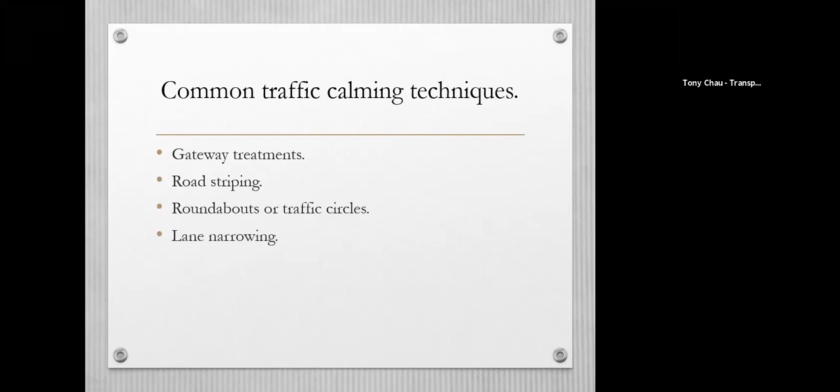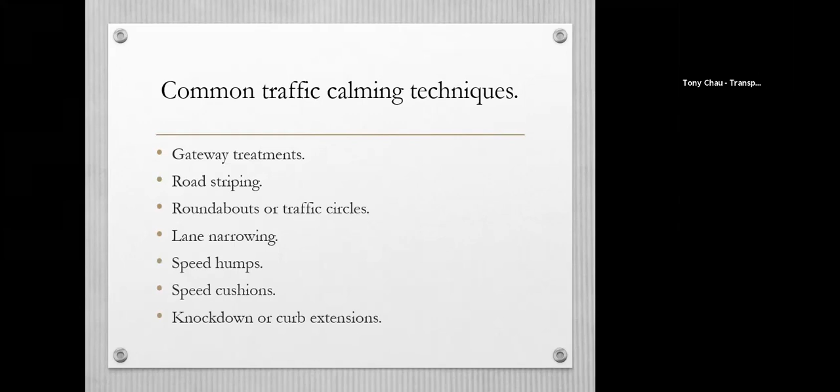Common traffic calming techniques include the following: gateway treatment, road striping, roundabouts or traffic circles, lane narrowing, speed humps, speed cushions, curb extension, and our newest option, which is speed display sign.

So we'll go through each of the options slowly, and hopefully you'll have a feel for what options you like and what options you do not like.

So the first option is gateway treatment. As you can see in this picture, there's a median with landscaping, a crosswalk and pedestrian-friendly features, and differentiated pavement to let drivers know there's pedestrians that could be potentially using the sidewalk, and also cyclists.

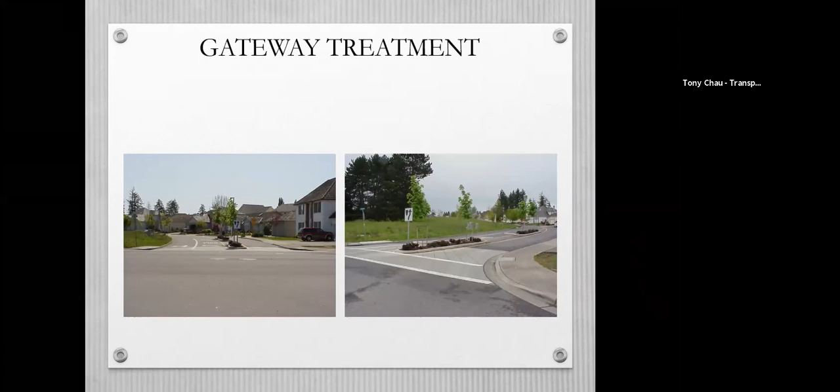You can also see the sidewalks on the side of the road. In this one, you also see a median, sidewalks, curb features, curb ramp features, and this is at a signalized location.

So here's the advantages of gateway treatment: it identifies a changing environment from arterial to residential street, reduces entry speed, reduces pedestrian crossing distance to make it safer for pedestrians. It can also provide landscaping, make the street look a lot better, and give it a sense of identity.

So disadvantages: the first disadvantage includes maintenance responsibility and high construction costs. So this is the first option—just think about how you like or don't like the option.

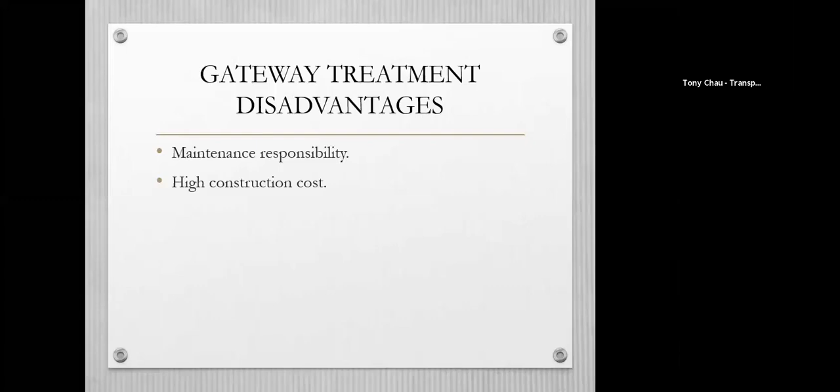And Tony, I wanted to let you know, just in case you didn't know, that we cannot see you—your camera is not on. So if you can turn it on, that would be good. Can you see me now? Yes, we can see you now. Okay, good job.

All right, so this is the road striping option.

So here's the advantages of road striping: the first one is it's really cheap, it may reduce speed, it can also increase the safety of cyclists and pedestrians because of the bike lane and sidewalk features, and it's also low maintenance. But with each advantage, there's also disadvantages.

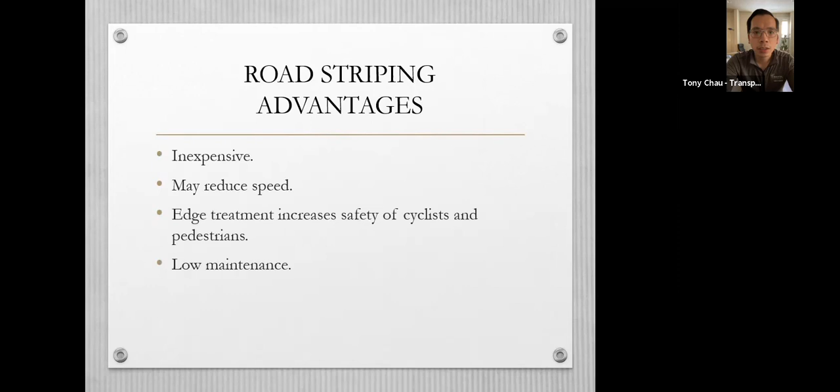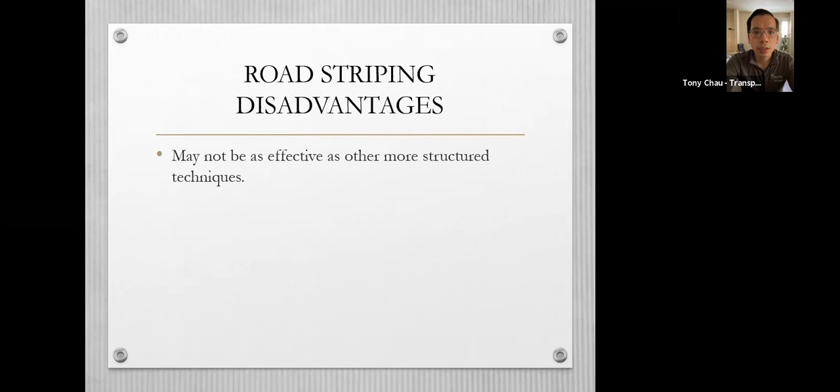The first disadvantage is it may not be as effective as a physical measure, something you can see on the road or feel on the road. This is our third option: traffic circles.

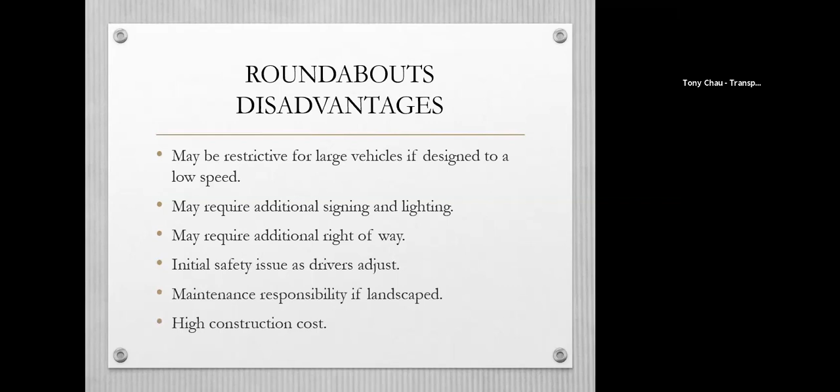And also high construction costs.

So here's the advantages: the first one is it's a minor inconvenience to drivers and local traffic. It's good for pedestrians if you put the pedestrian-friendly features in the middle to cross and make it safe for them. You can put landscaping. And it also slows traffic without affecting emergency response. And it's really effective when used in a series with either more medians, curb extensions, or speed humps or cushions.

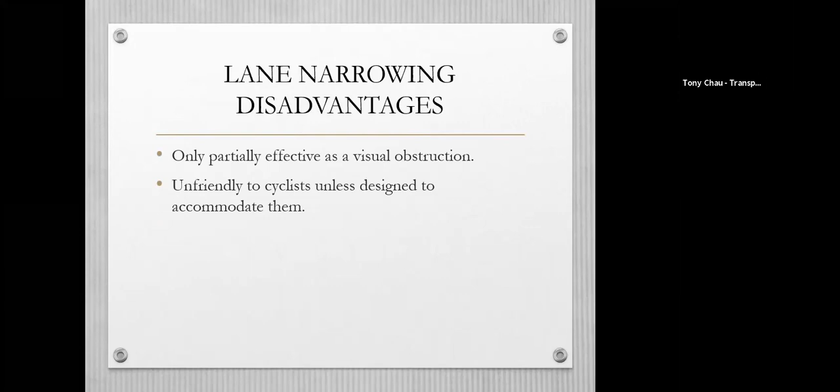So here's the disadvantages: it's only partially effective as a visual obstruction, and unfriendly to cyclists unless it's designed to accommodate them. It can also create conflict if you put the curb extension on the sides - sometimes the road becomes more narrow, so bigger vehicles may have to look out for each other. And it also may require parking restrictions, so you may lose parking on the sides where the median or curb extension exists.

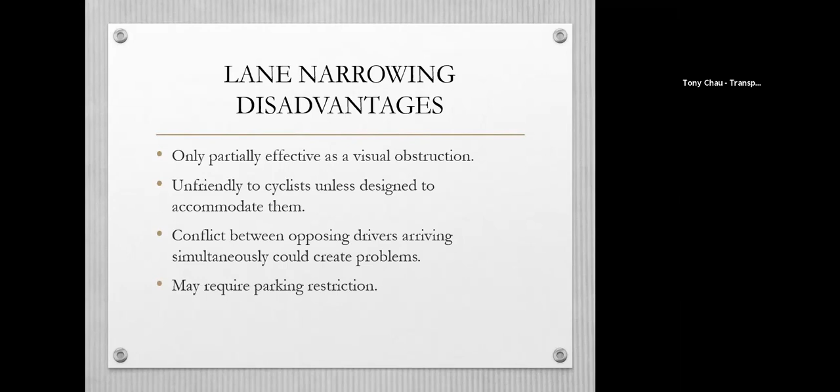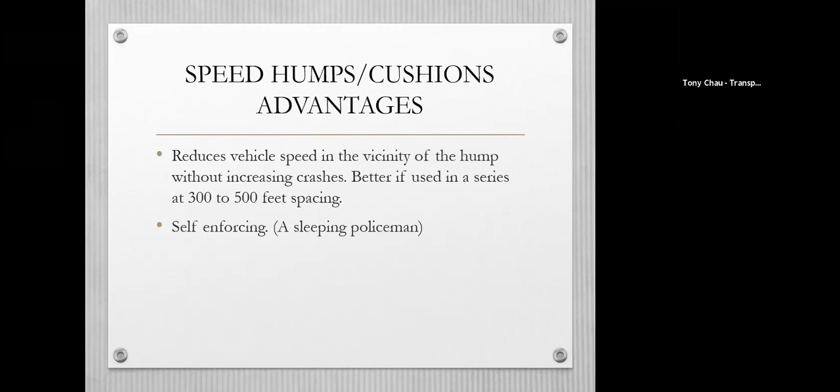Here are the advantages. The first is reduced vehicle speed, and it's usually used at 300 to 500 feet spacing. It's really self-enforcing, so people have to slow down, otherwise the way their vehicle is traveling will be seriously affected and it can damage the vehicle if they don't slow down. It's also relatively cheap.

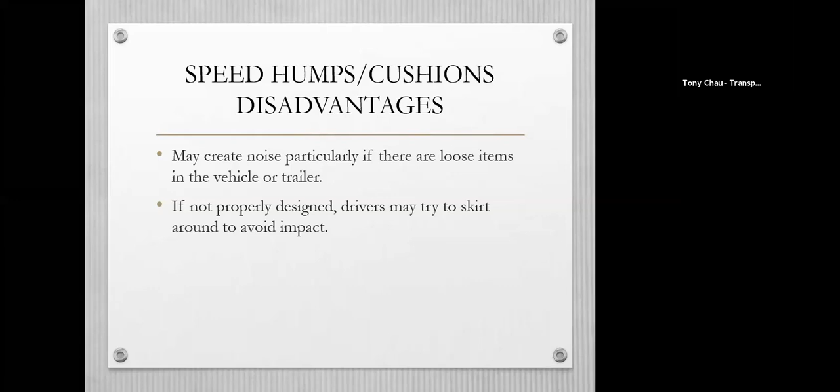And the disadvantages: it can be noisy if bigger vehicles go through. Drivers may try to avoid it if it's not properly designed, and it may also be a problem for emergency vehicles if not properly designed. So when we design it, we have to account for all drivers, larger vehicles, and emergency vehicles to make sure they can still use the road safely and effectively. It may also impact drainage if we don't design it properly, and drivers may speed up if the speed humps are too far apart.

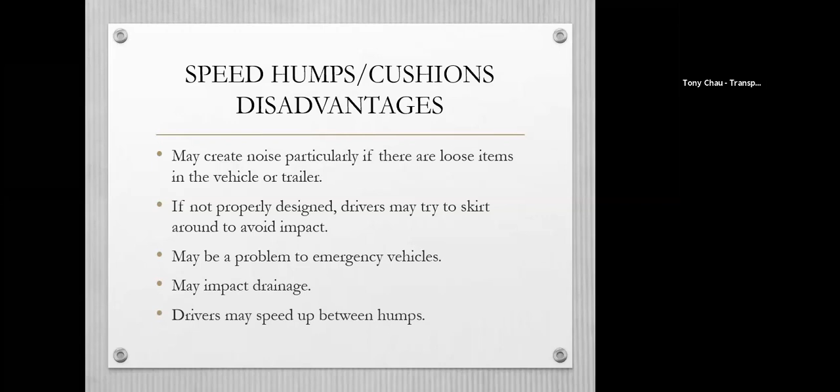It may increase traffic volumes on other streets if it's not properly designed, and it requires signage that may be considered unpleasant.

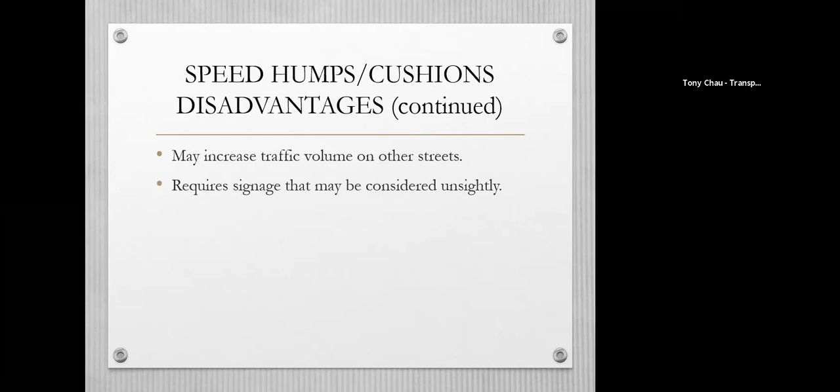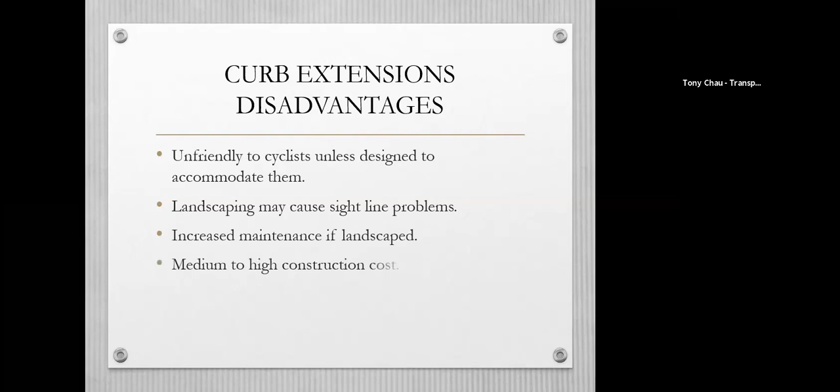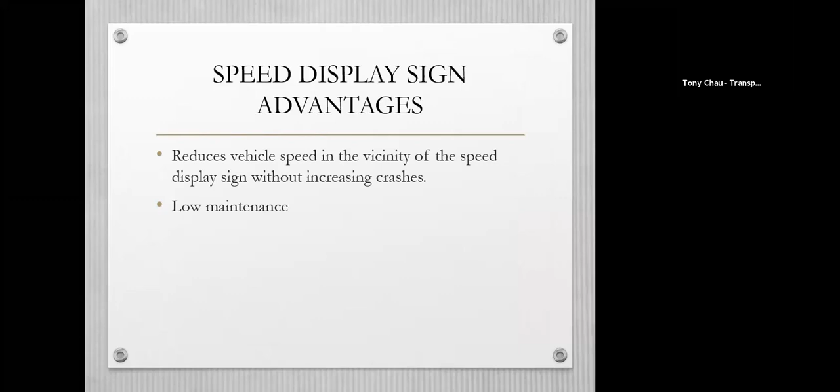Here are the advantages: it reduces vehicle speed and doesn't increase crashes. People usually see the sign, and when it flashes, they tend to slow down. It's also low maintenance. But there are disadvantages too — it has higher construction costs because you have to install the wiring and power necessary to put the speed display sign in, and also the right of way that you might need.

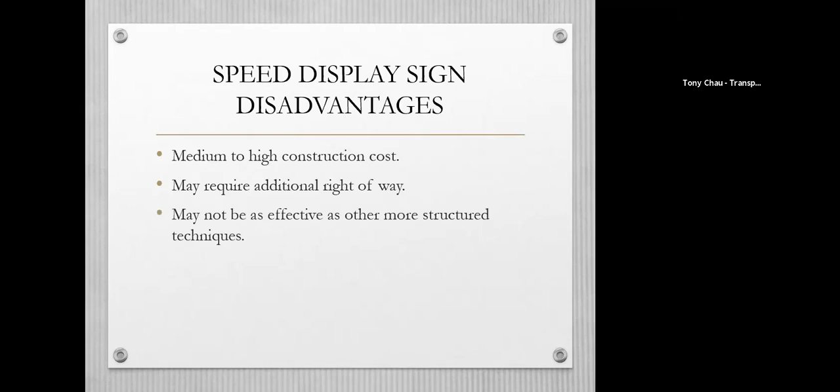Now we open up to questions and anything else you have at this time. Any comments, anything you want to bring up, please bring it up and we'll be glad to help you out and answer them.

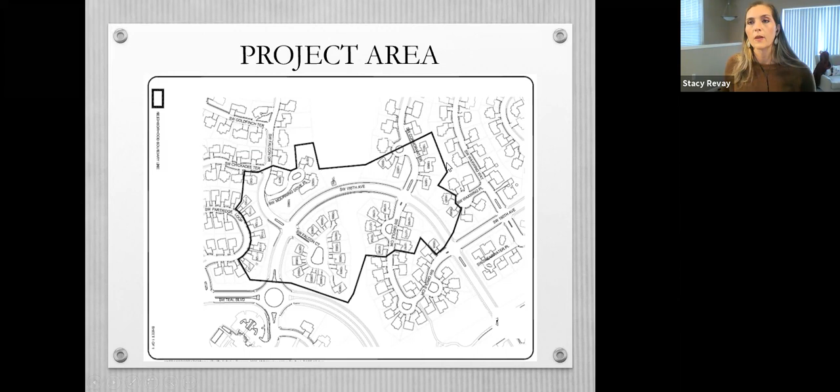I know this is kind of a hard map to see, but... Falcon and Cormorant.

I think this line is at 250. Yes, we did set it at 250. So if you're on Cormorant, and then if you're one house above, it's probably best to send us an email, because then we can work with you to try to include you if we can in the project.

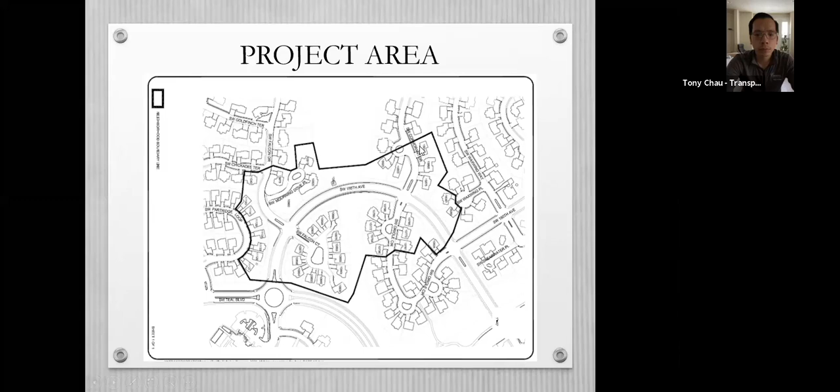Next question. We desperately need traffic mitigation and calming. We tried to get traffic calming 6 years ago, and the city traffic engineer discouraged our efforts. How did this project finally get initiated this time? In the past, when we did speed studies after receiving your requests, the 85th percentile speed was never 5 miles or over the posted speed limit. It seems recently the speeds increased further and went over 5 miles per hour over the posted speed limit. So that's why the project now qualified, and before it did not.

Okay. Next question. Our neighborhood needs traffic calming on the length of Teal Boulevard, 155th Avenue, and 160th Avenue. We know you've measured the traffic on all of those streets. You have the data. Why are you just considering this small stretch of 155th?

First, the request was for 155th. That's where the request we received. Teal Boulevard is posted 35 miles per hour, and streets that are posted 35 miles per hour with 3 lanes don't qualify for the program. If you would like to consider traffic calming on Teal Boulevard, it's out of the question because of the posted speed on it.

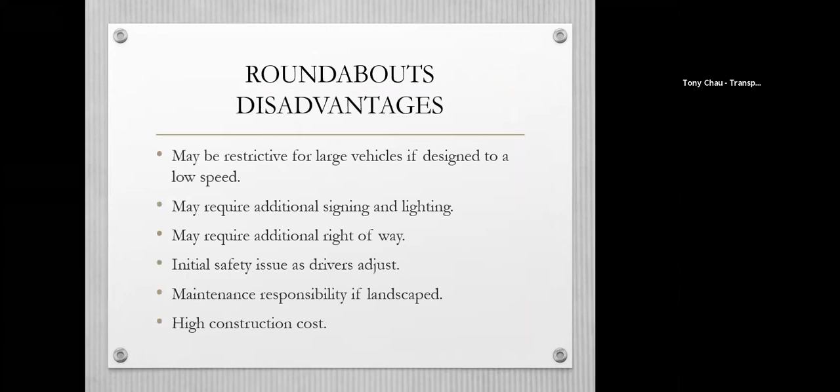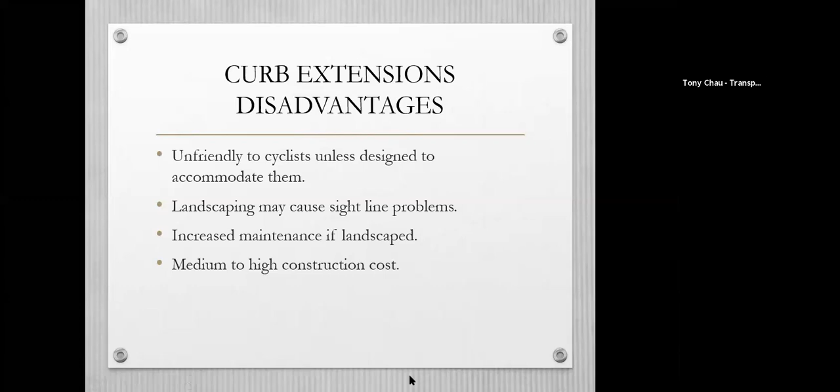In the past, prior to 2003, the manual on uniform traffic control devices did not have a specific sign for speed humps. They used to use the bump sign with arrows down at every speed hump. Then in 2003 the manual changed and they came up with this sign, saying you put it at the entry point, and sometimes in between. If the project is too long, we'll put some in the middle to remind drivers. But most of the time, if you put one at each end, I believe 155th probably will have one at each end for each direction of traffic, and it should work.